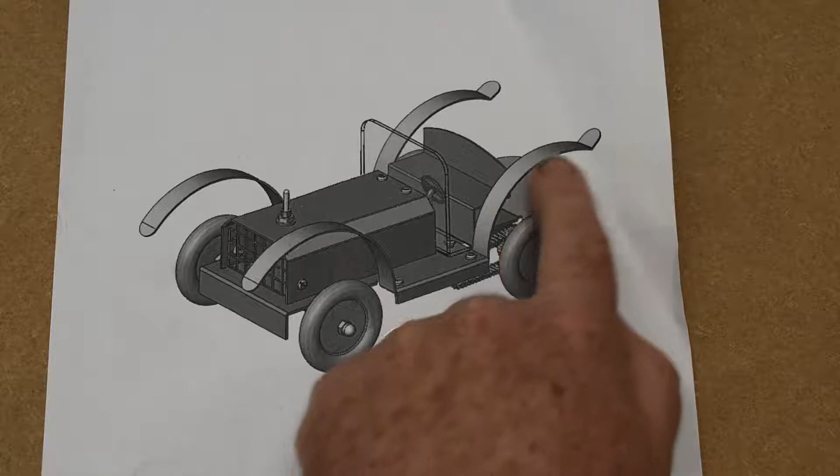In this series of videos we'll be looking at the 2007 Ordinary Level project, which is a vintage car. You can see the picture of it here in front of you. There's some difficult parts in it. The first part is quite tricky to mark out. These can be tricky to bend, the mudguard type features, and they're all one piece. The design feature, you have to design a steering wheel and steering wheel support, and that's it.

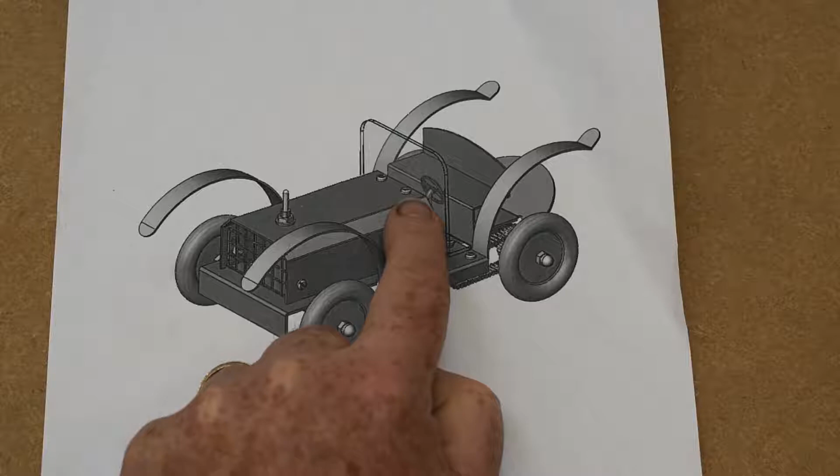And in terms of electronics, there's a switch here which is wired to a motor underneath, and we have a chain driven back axle. The wheels are wooden, so those are bought and we won't be making those. I have them. And the only other thing you'll need then, it will say, is piano hinge. This bonnet will flip up and it's piano hinge attaching it to the windscreen here.

Other than that, it's not too difficult a project. A little bit of bending in it that's a little bit tricky at times, but nothing too difficult. So might as well get started with part one.

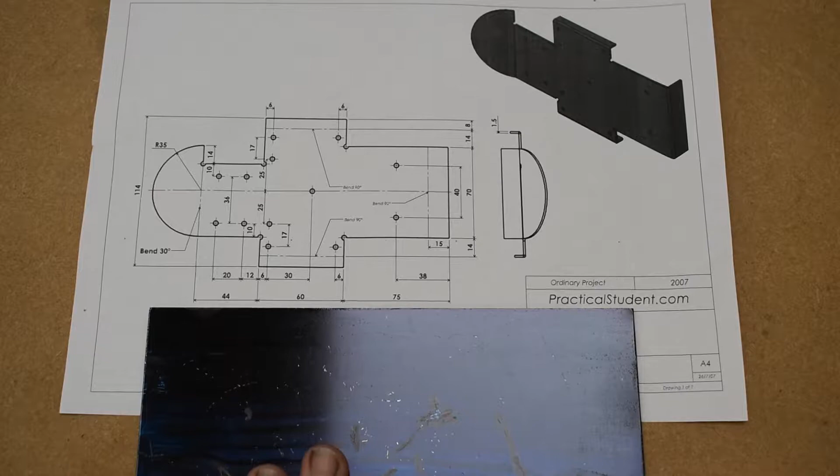So here we have the working drawing for part one. As you can see, there are a lot of holes in it which have to all be marked out for it. I think there's 18 in total, although I'm not 100% sure. It's a little bit different in that there's part of it protruding up and down, so we have a section missing here and here. I'm going to start marking out from this bottom right hand corner.

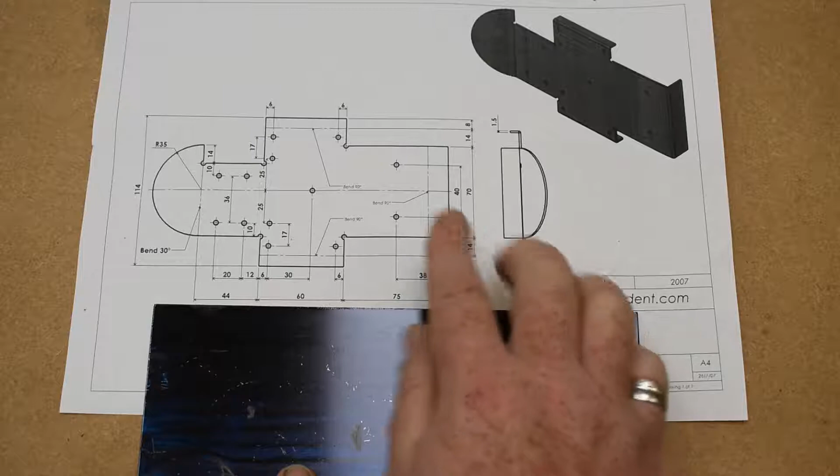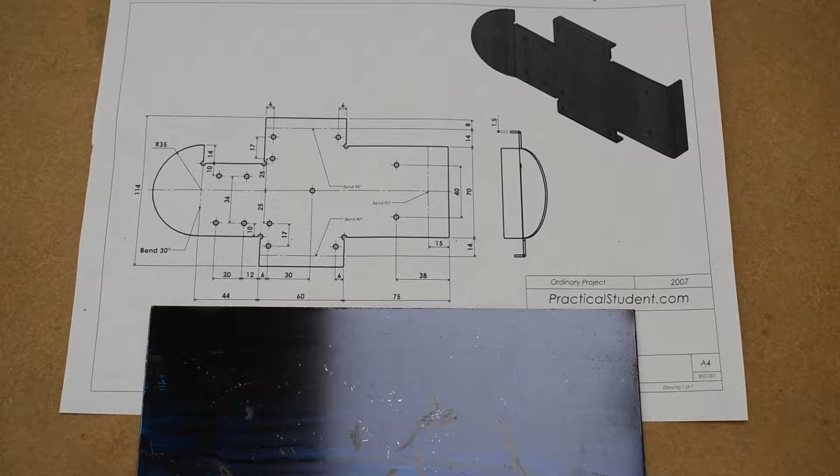Bending it, we have to bend this front curved section up in relative terms to these three sections, the two sides and the back, which have to bend down. So I'll be putting those bend lines on the back side of the piece after I've cut it out, and we'll leave the bend mark here so that we can bend it up. To bear that in mind sometimes when you're marking things out. So we're going to get started, and we're going to try and take in sections like this section first, this section, and the end.

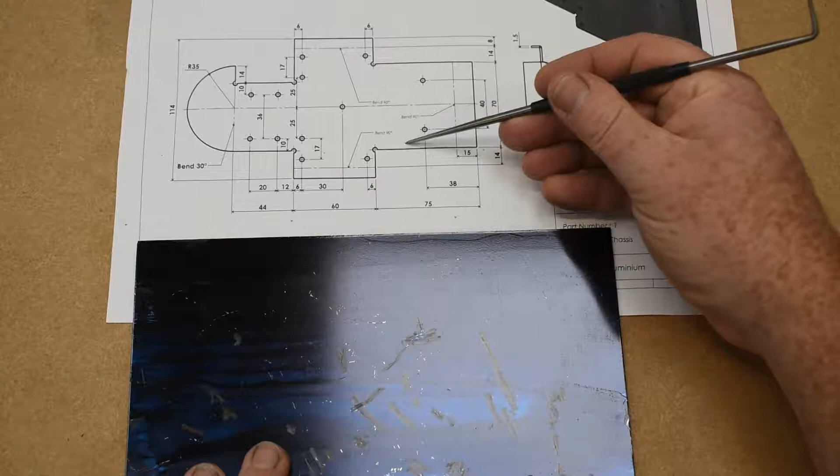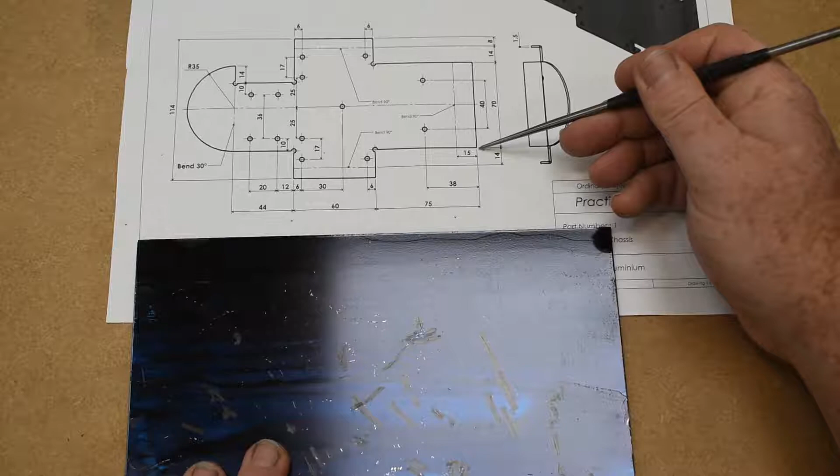So I'll move this a little. Now we see there's a center line here, and this is important. We're told that from this bend line up to this edge is 14 millimeters, but we're not told how far it is from the bend line down to the bottom edge. But because we have the center line, we can see that up here it's 8 for that same section. So we know that this distance from the bottom right corner of our metal up to this line is 8. So we're going to mark out 8, then 14 up from that, then 70, but we're going to mark the 35 in the middle, and 14 and 8 first of all on the right hand side.

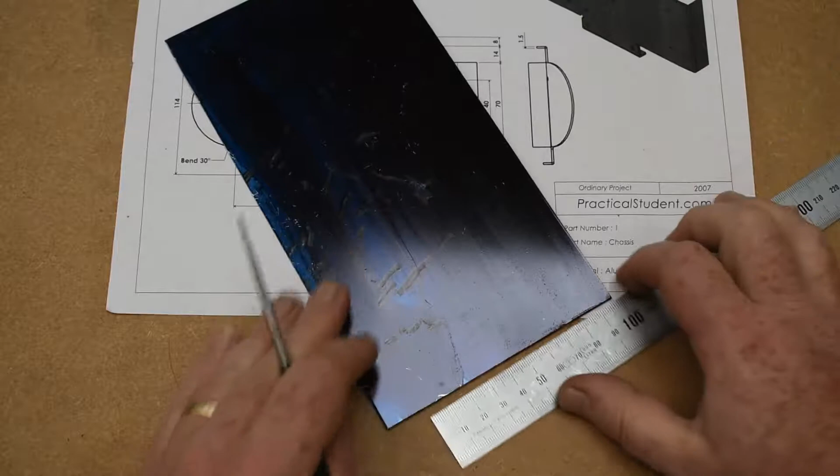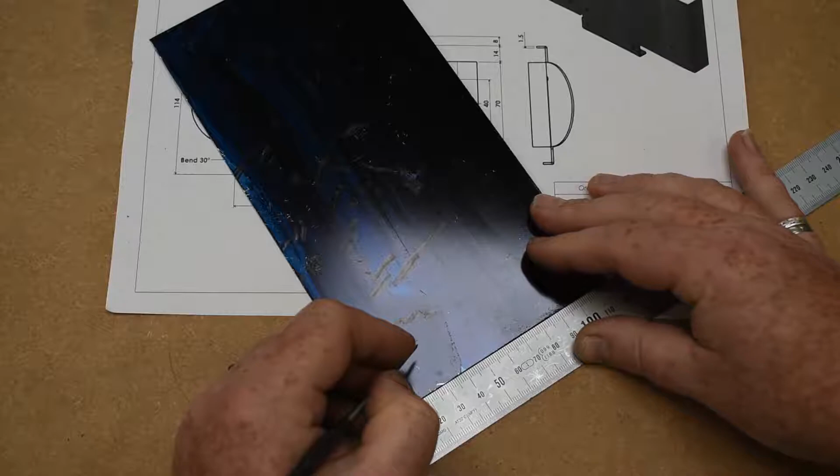So I'm going to come up 8, plus 14 is 22, plus 70 is 92, plus 14 is 106, plus 8 then is 114. I also want to mark the 35 between these 2 points, and there we go.

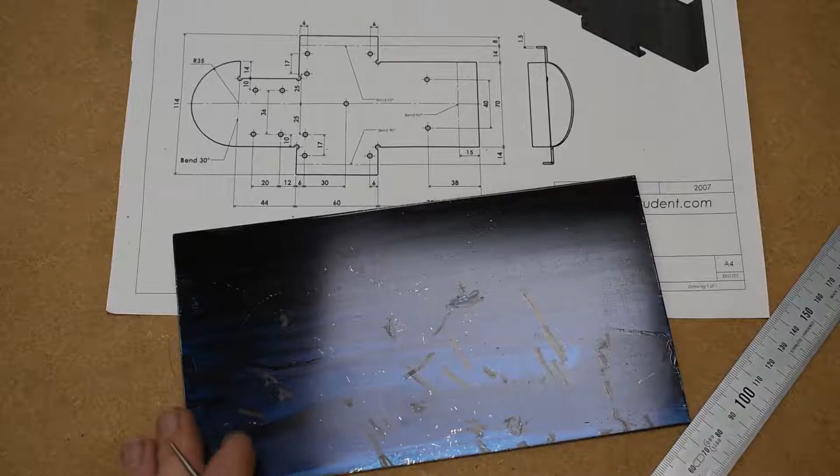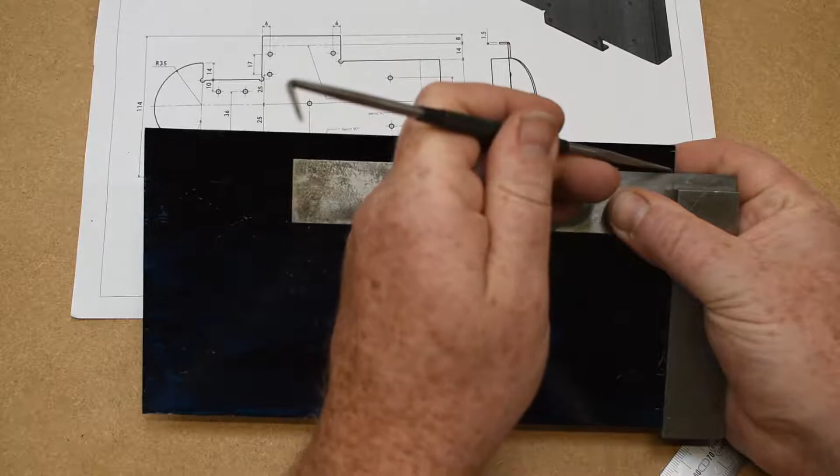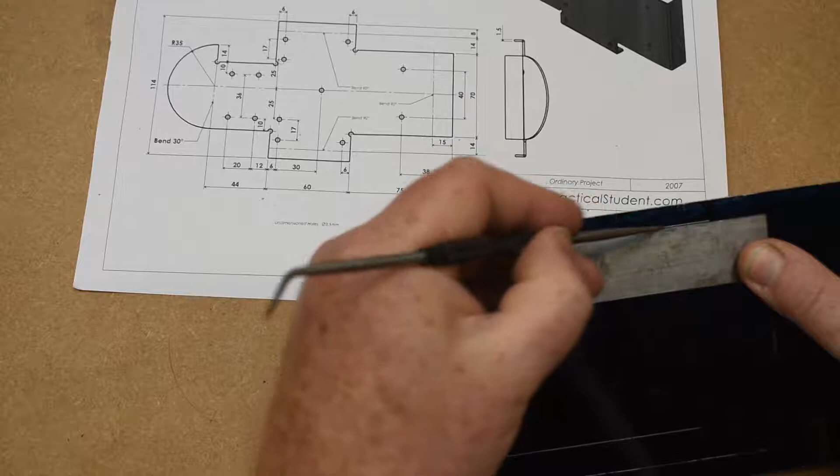Now I'll be able to T-square some of these, and then I'll want to use a ruler for the others, because the T-square won't reach the whole way, but it should reach far enough for these. So I'm going to T-square that line across. This one doesn't need to go the whole way. This one is the bend line here, so we probably need it just about there. And this one goes all the way across, and the center line goes all the way across, and we need this top one just here. So I'll do that one as well.

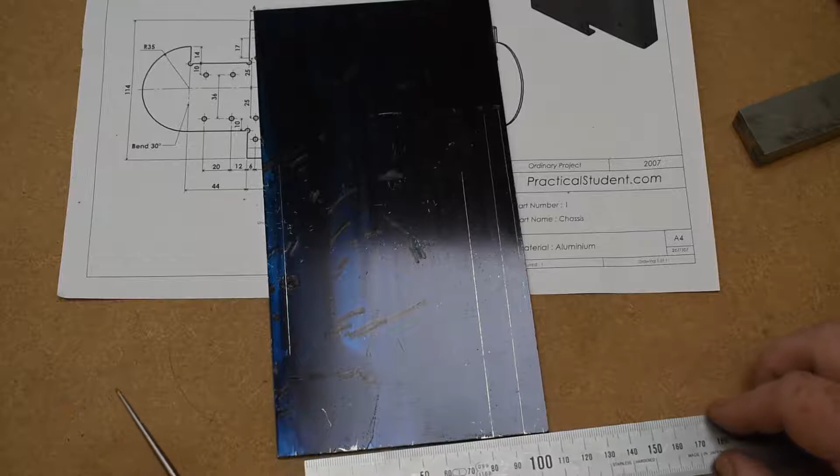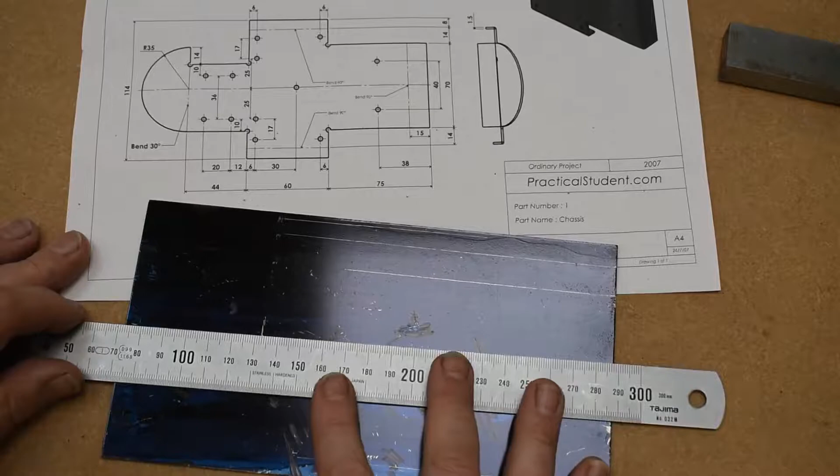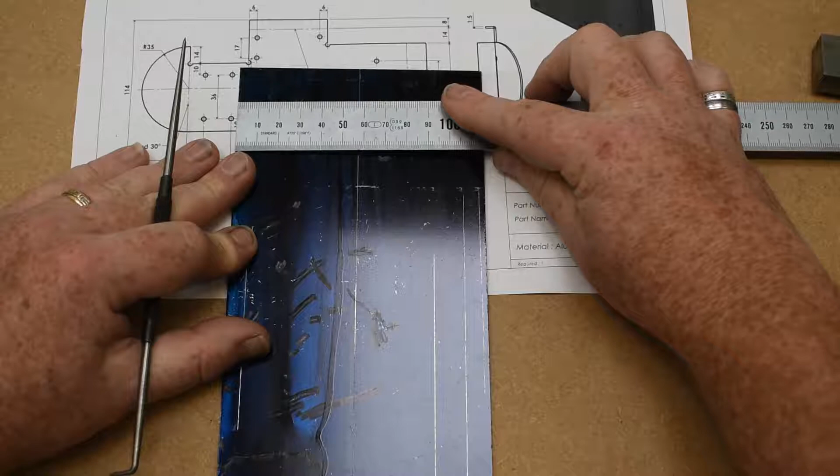Now for the center line, I'm going to measure up the distance here, which is 57. Just double check. I'll mark 57 up here as well. It should be 8 plus 14 plus 35. And I'm going to join those two with my ruler. I also want to do this line long as well, and we know that's 8 plus 14 up. So 8 plus 14 is 22, and I can join those two marks up as well.

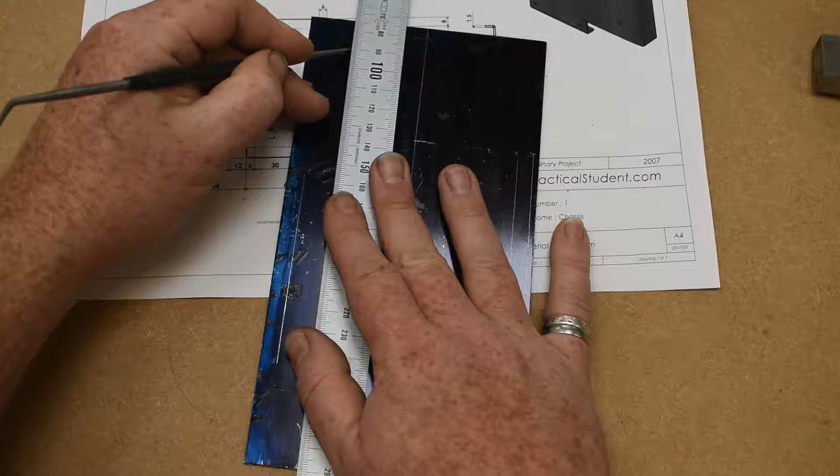So that's most of the horizontal lines for now. So let's deal with this section first of all. So it's 75 up to this line. So 75 from the bottom right hand corner. T-square that line up.

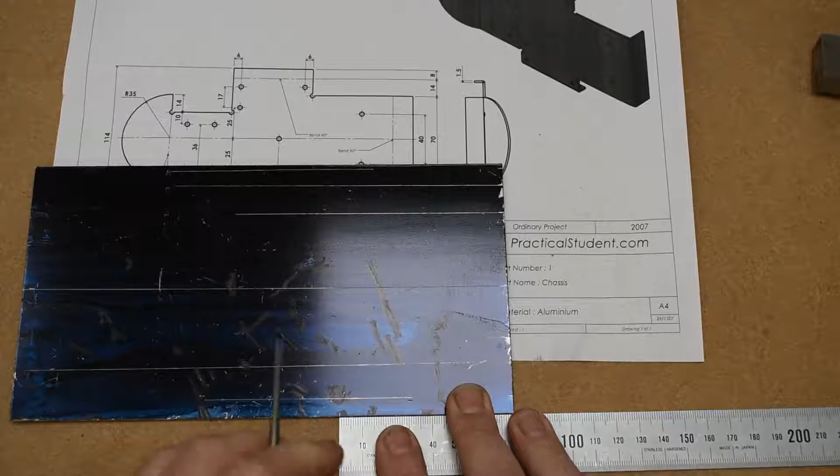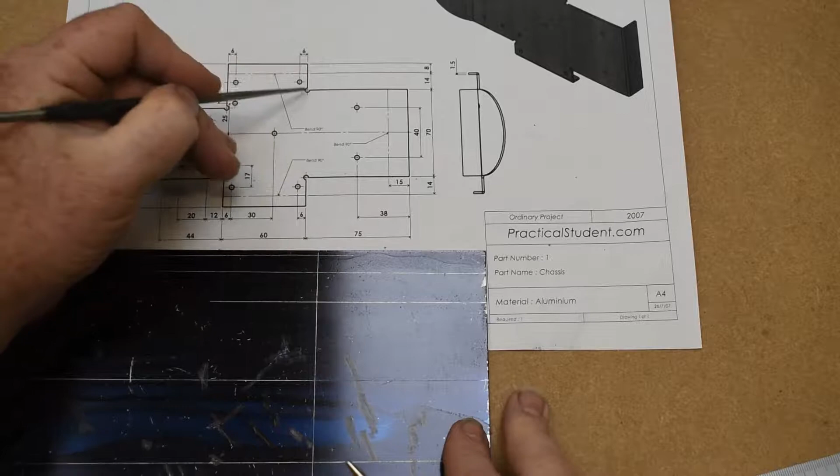Now we're going to have a hole here, so I'm going to center punch that point and this point here, which are on the 14 lines. And we also have a bend line here, 15 in, and 38 in.

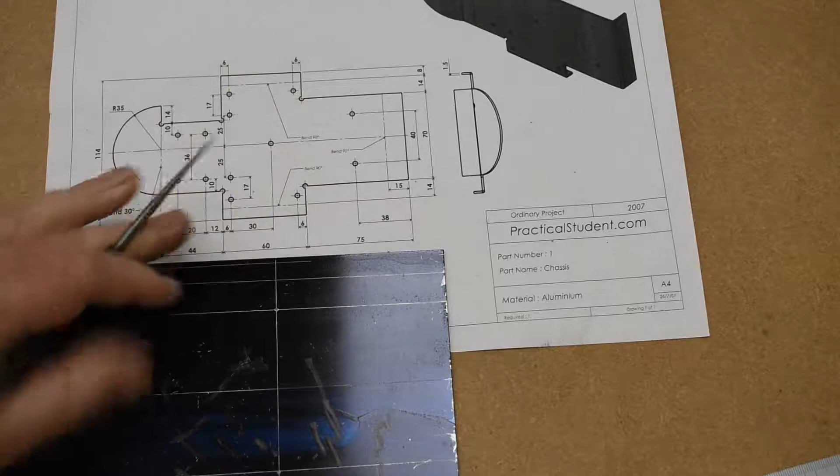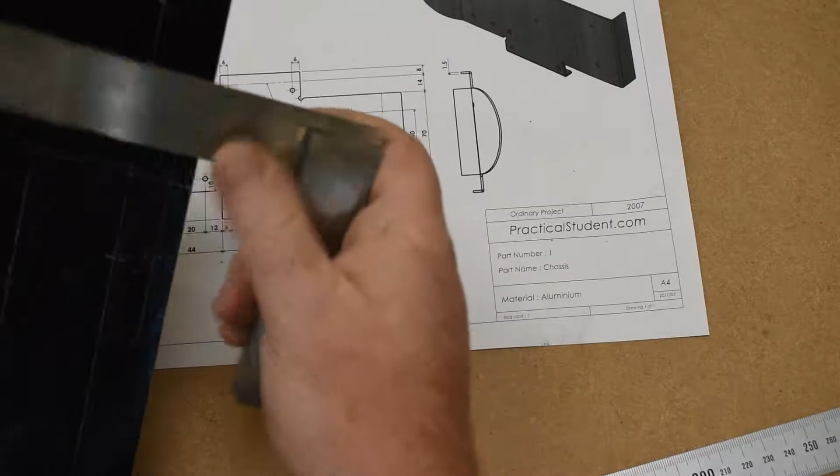We have these other two holes. So 15 from the right hand side, and I'm going to measure 38 in as well. That's 10, 20, 38. I'm going to T-square those up. I'm going to dash the bend line. Onto a solid 38 line.

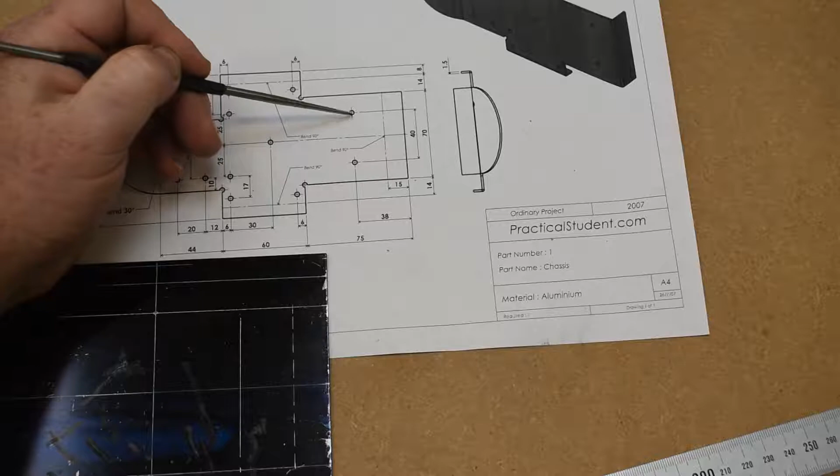Now we're told here that the distance between these two holes is 40, so therefore from the center line it must be 20 up and down. So if I put 100 on the center line, that's 120 to the right and 80 to the left. I'm going to punch both of those. I'm going to drill holes there.

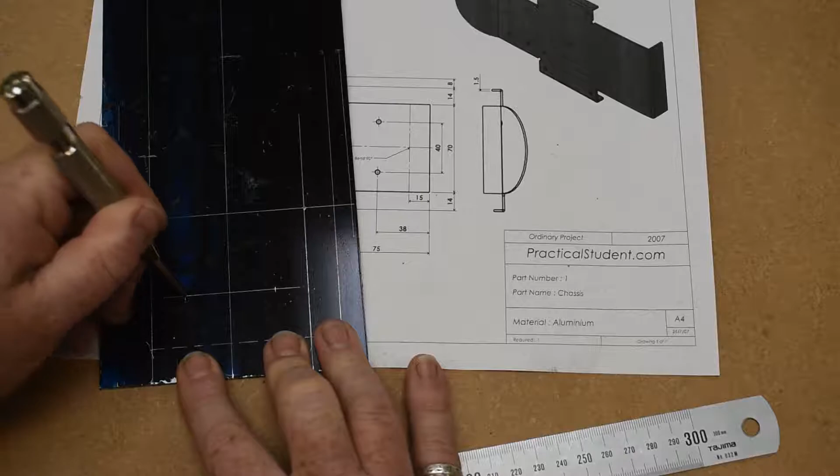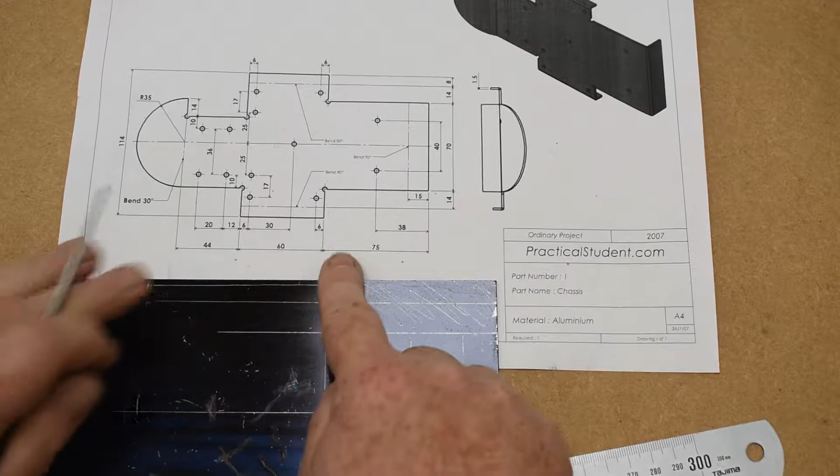I'm just going to shade in the two areas here because we'll be cutting those off later on and it makes them stand out a little bit. So that's the back section done. So now it's the next section. We're told here it's 60 wide. So I'm going to measure from my 75 line over 60. T-square that line straight up.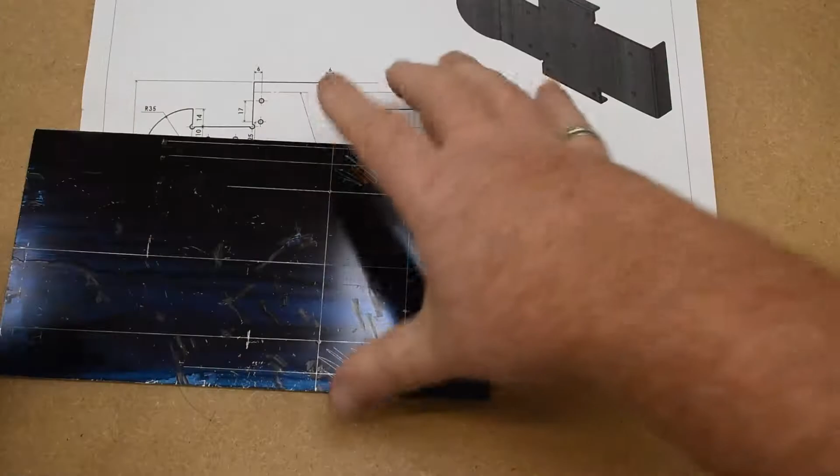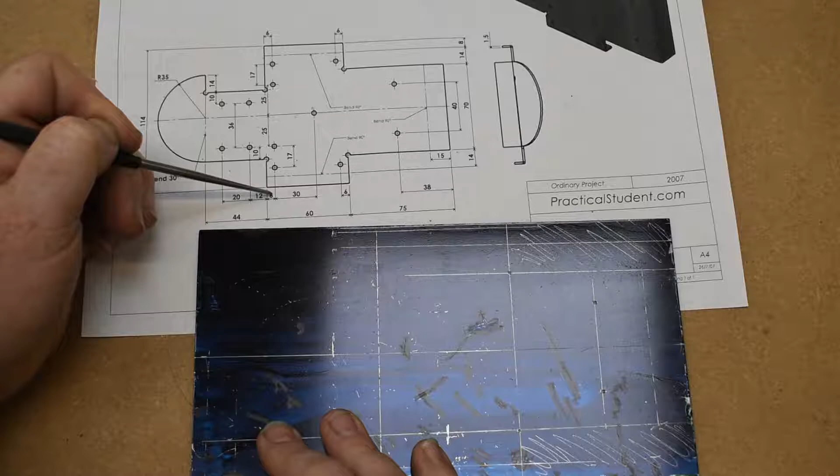Now let's see what we need to worry about in here. So these two holes are 6 millimeters from the edge, and these two holes are 6 millimeters from the edge, and this one on the center line is 30 plus 6 from this line. So on the center line we can measure across 36 quite easily. Mark that and punch it straight away.

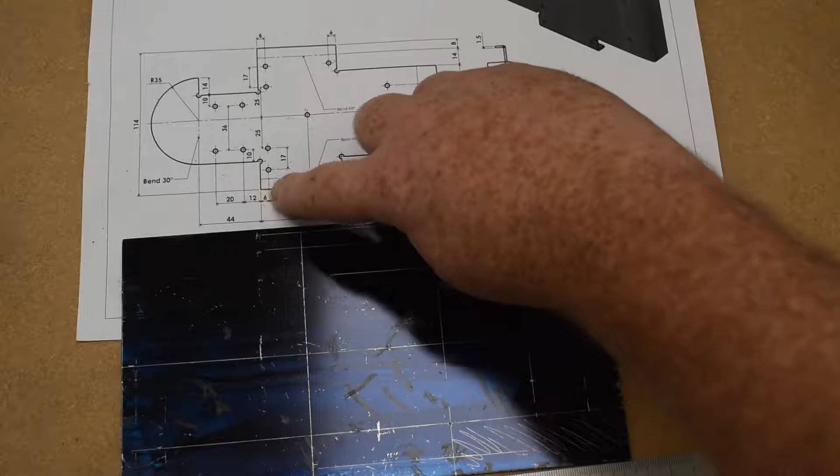And then for these other 6 holes, because there's 2 here, we're going to measure 6 in from this corner and 6 in from this corner, and then T-square the lines up.

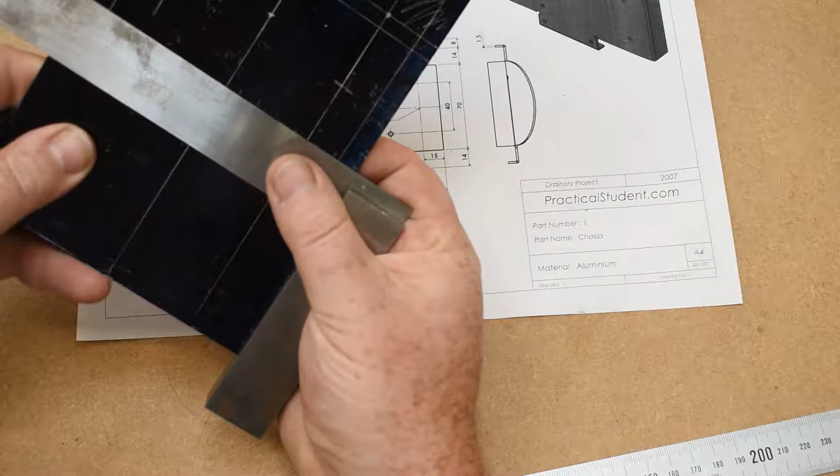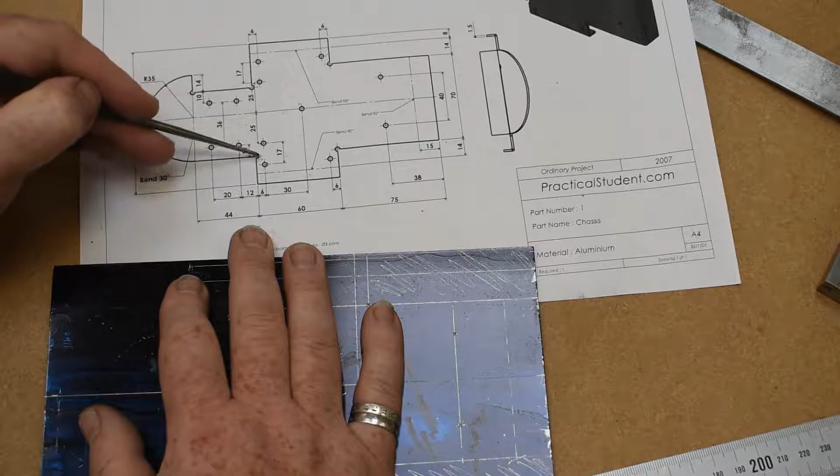So let's figure out where these holes go. It's actually quite involved when you look at this drawing. So we have this line here and we're told that it's 10 to this line for these 3 holes, and then 17 back down. And that's the same as 25 from this line to the centre line. We're also told it's 25 from the centre line up to this hole and then another 17. So we're going to use that. We're going to measure out 25 and then 17 from the centre line in both directions.

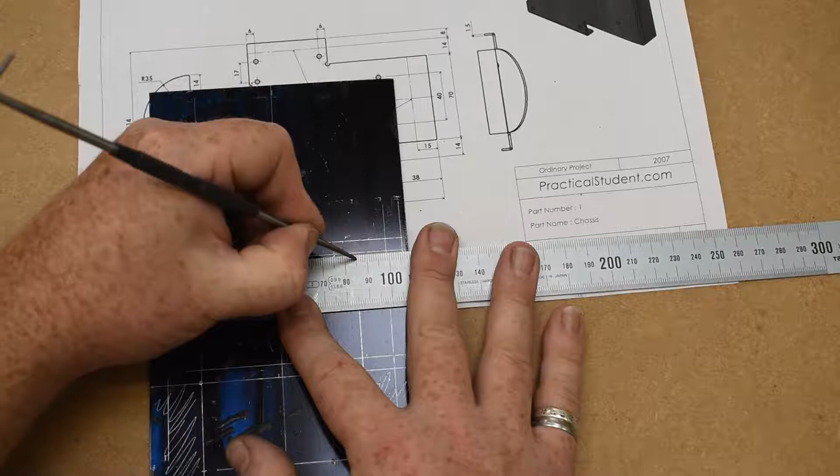I'm going to start on the centre line with 50. If I go 25 down, that gives me 25. And if I go 25 up, I'm at 75. And from there we need to go 17 millimeters each direction as well. So that's 10, there's 17, that's 10, and then another 7. There we go. So we now have those 4 holes which we can punch before we lose them.

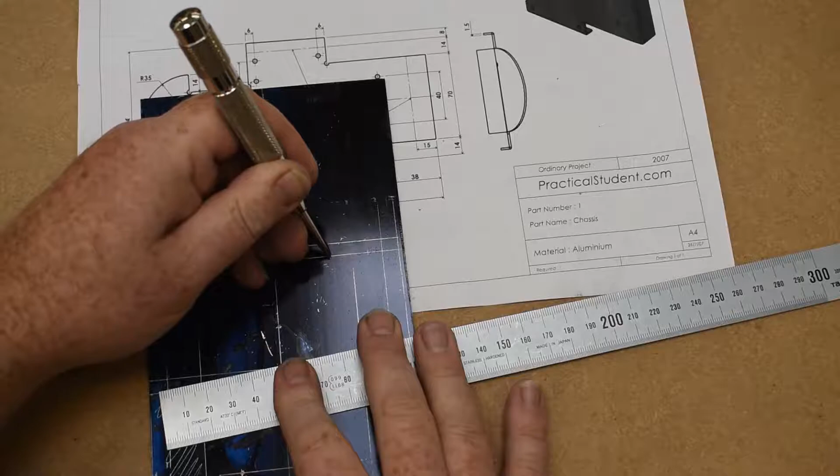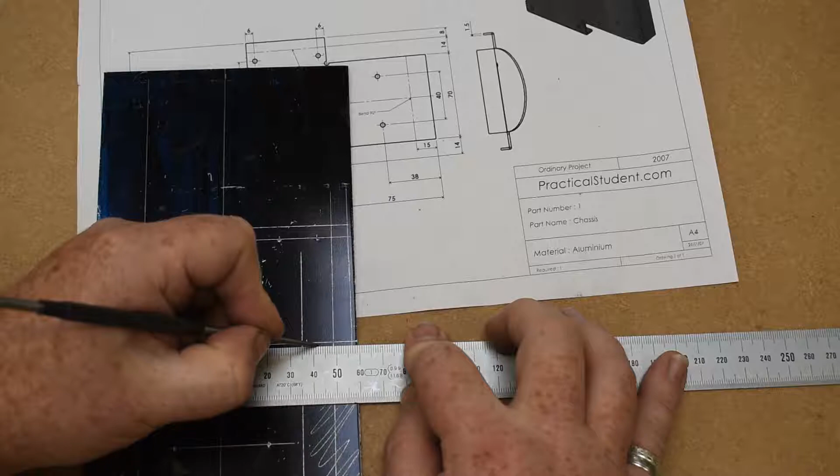And you can either T-square these lines and transfer them over, or you could calculate the distance there, which is 25 plus 17 or 42, and measure that out as well, which I'm going to do. And again, we punch those and we have that middle section done.

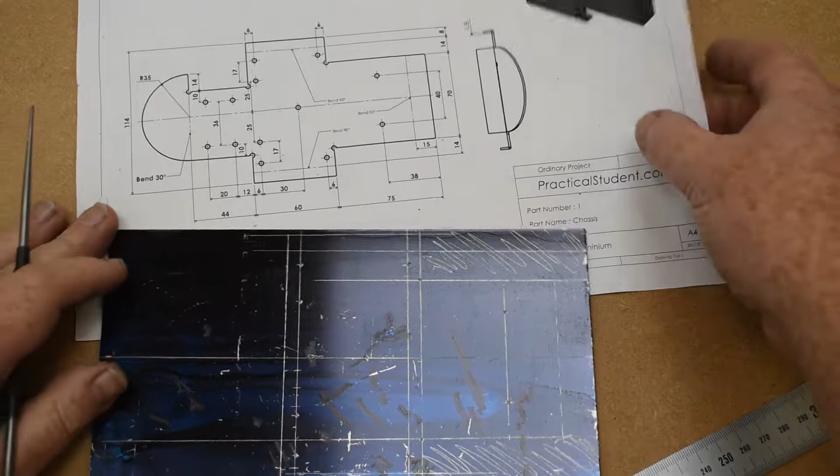Okay, so on to the next section here. We're told down here it's 44 across from the 60 line. So I'm lining up 44 on my ruler here. I mark the end of the ruler, I'm 44 away. T-square that up.

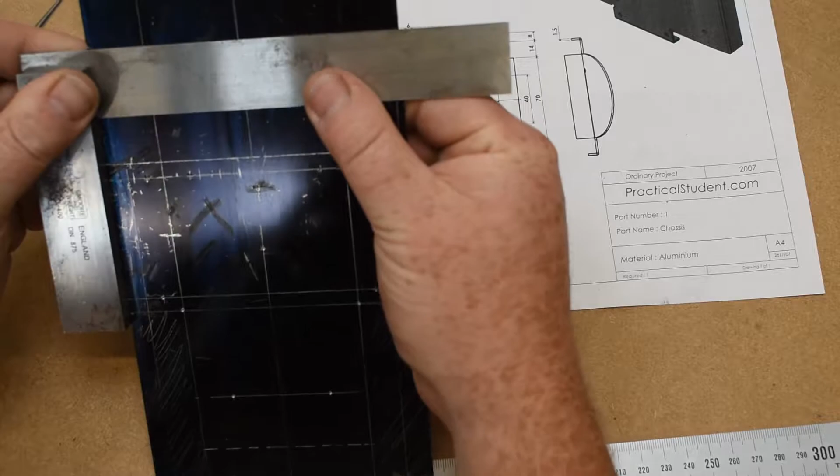And that coincidentally gives us this point here, which is the centre of this curve. We might as well do that now. So I'm going to punch there. Set my dividers to 35 millimeters. So I'm starting at 10, which means I have to go to 45. And I can draw that semicircle.

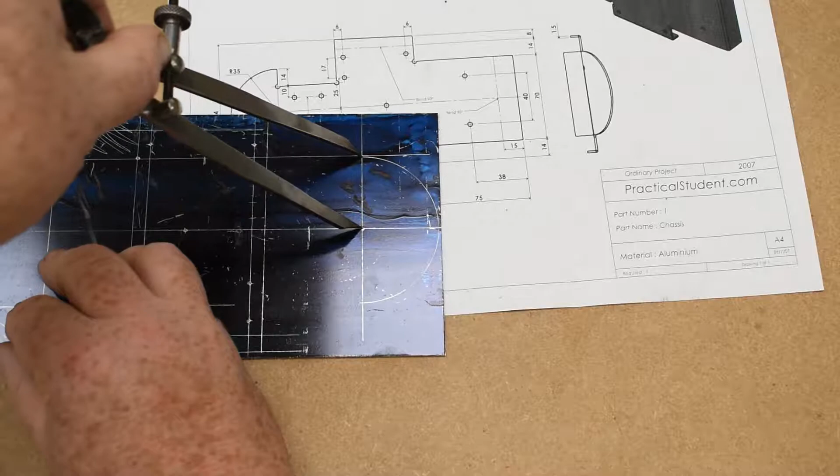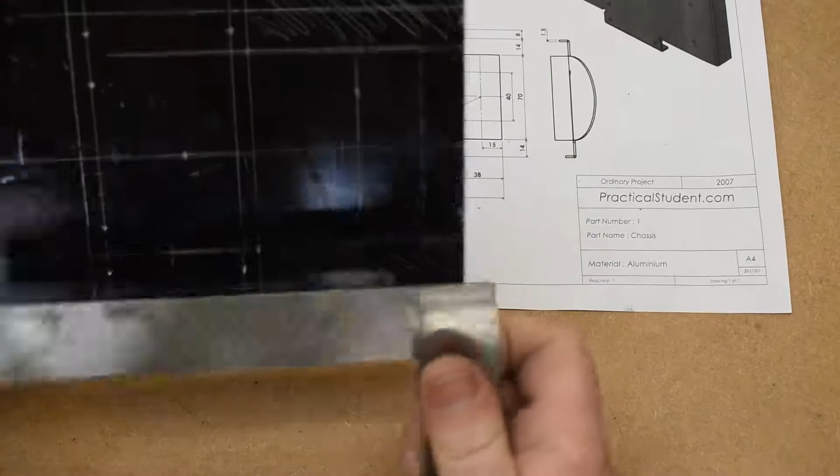Okay, so let's look at these 2 holes here first of all. They're on the same line as this one, so we can T-square that point across first of all. Will my T-square reach from this side? Looks like it will. Maybe not. I know this piece is square, so I can T-square it from the other side.

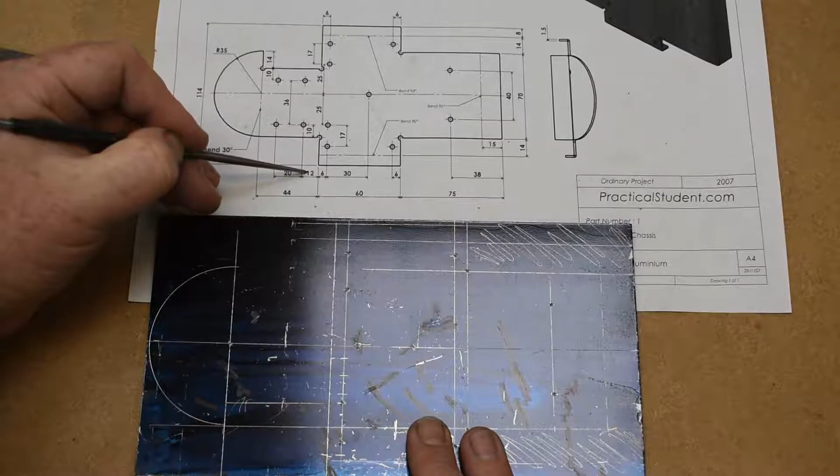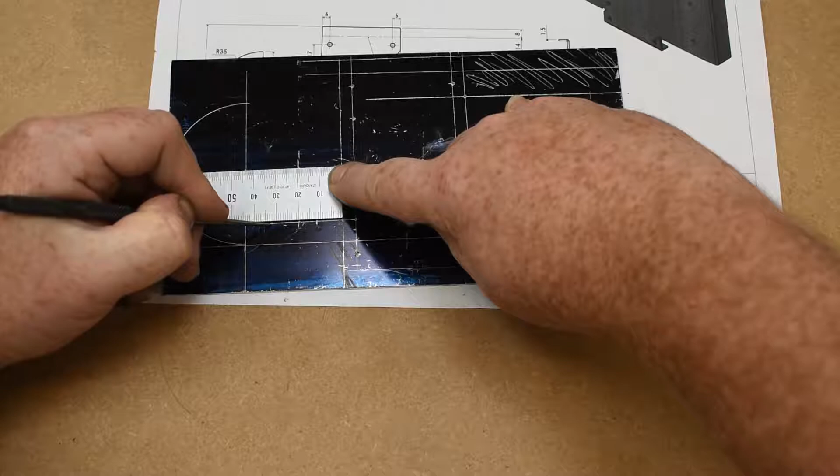And then the distance from the 60 line to the first hole is 12, and then to the next one is 20, which is a total of 32 from here. So I'll do it upside down this time. So there's my 60 line. So I need to go 12 from that, and another 20, which is 32. I'm going to punch those. And we're nearly there.

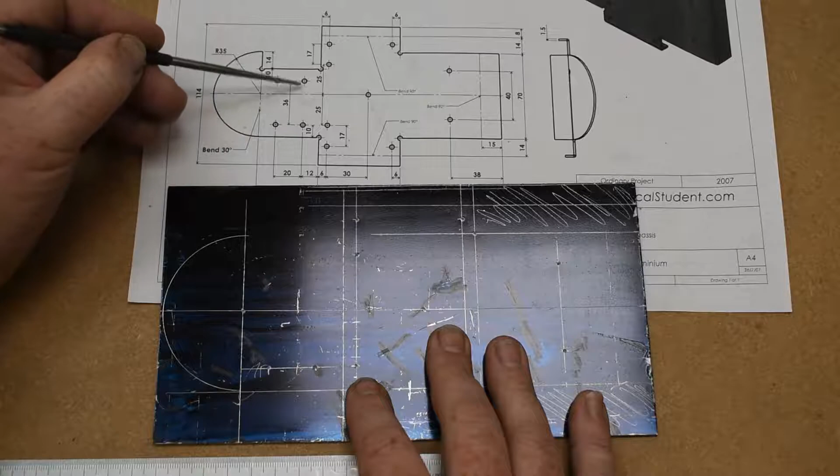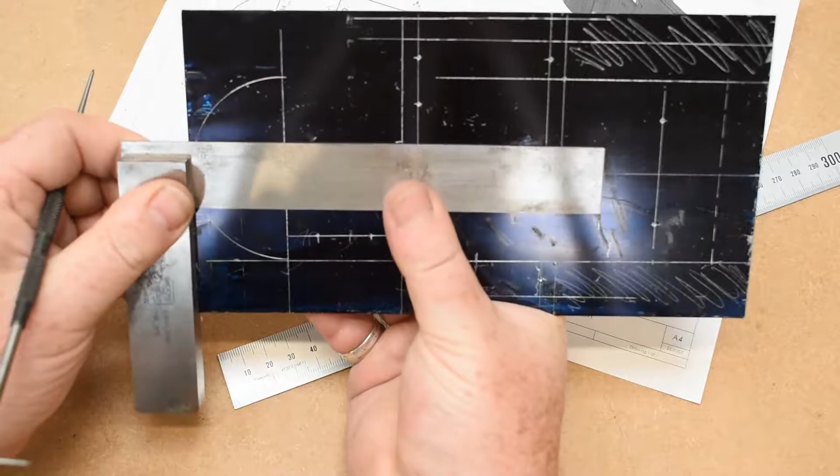The centre line for these 2 is 36 up from the centre line for these, and they're on the same vertical line. So I want to measure over 36. I'm going to T-square this point to the left. And then transfer the 2 punch marks straight up. And then punch those.

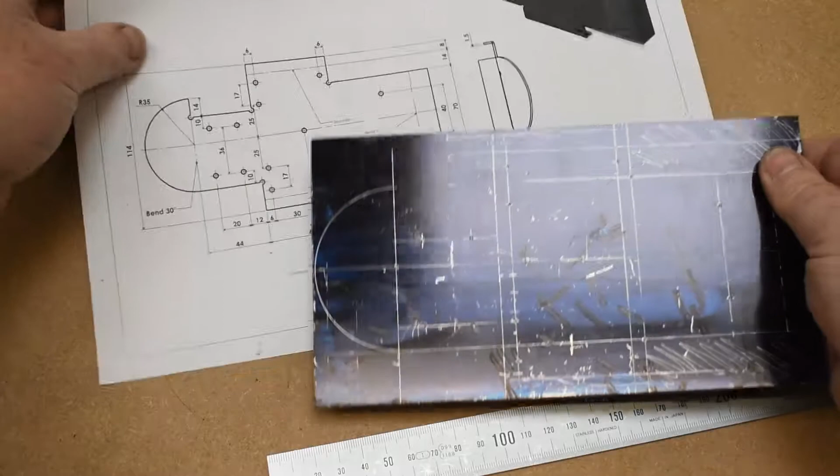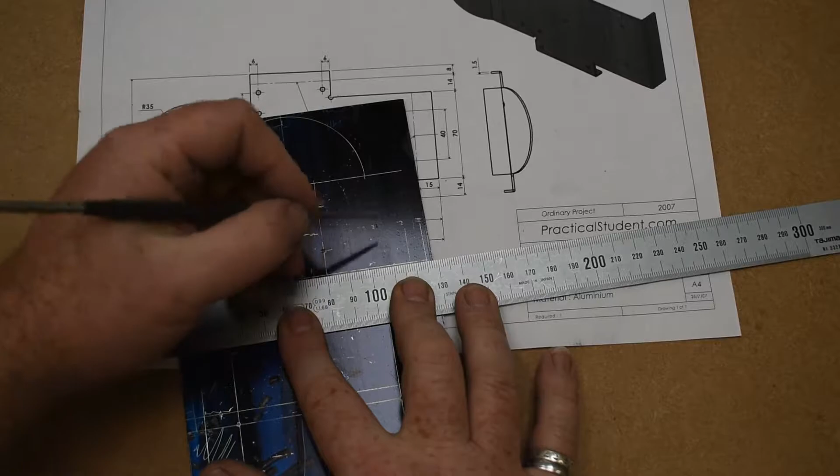We are then told that from these 2 it's 10 millimeters up to this line, and at each end of the line we have a punch mark for a hole as well. So 10 more millimeters up. So you square that across. And we're going to punch here and here.

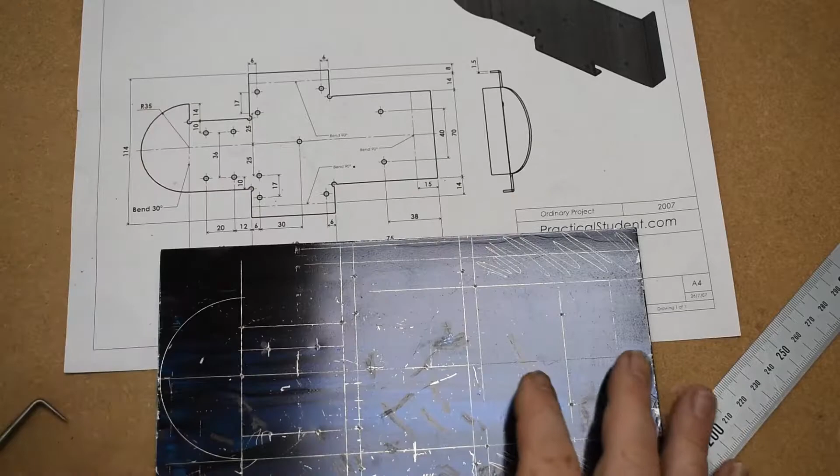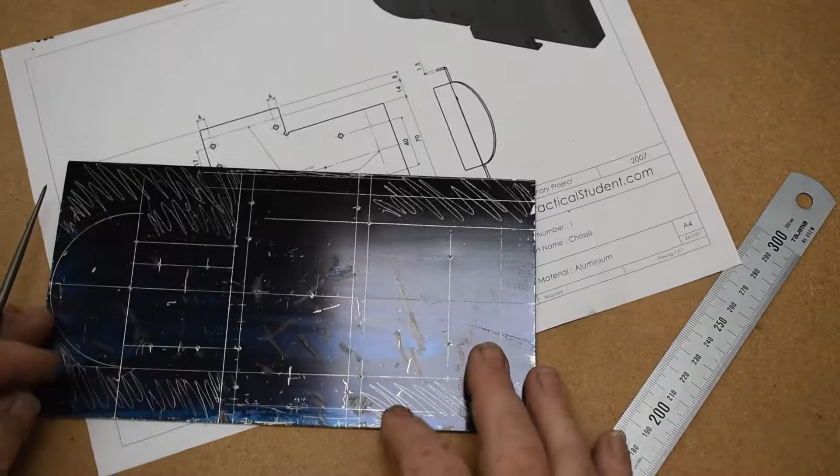And that's it, we have the part marked out. Just going to shade in some of the areas to give us a better idea of our final shape. So that's it marked out. It's quite tricky, it's not easy, but it's very doable if you take it in sections.

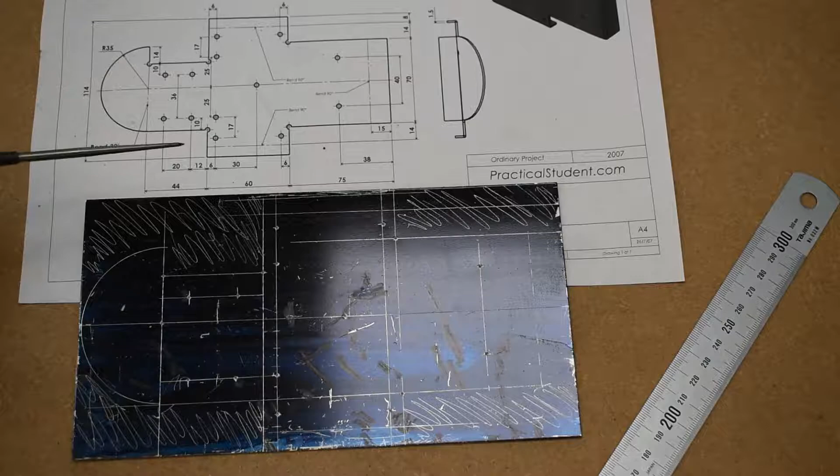So now we have to go drilling holes, and we have a lot of holes to drill. 19 holes to drill, if I counted correctly. They are all 3.5. The drawing tells you, might be difficult to read here, but undimensioned holes stand for 3.5, and that is all of them.

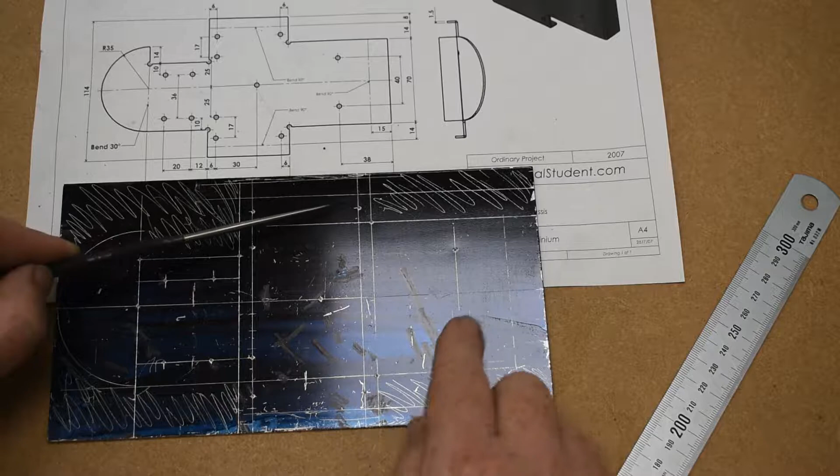So I'm going to go drill those now, and then I'm going to use a bandsaw. You'll have to use a hacksaw or snips to cut out the different sections, file it down, and then I'll transfer these 3 lines, bend lines, onto the other side, and then we'll bend it.

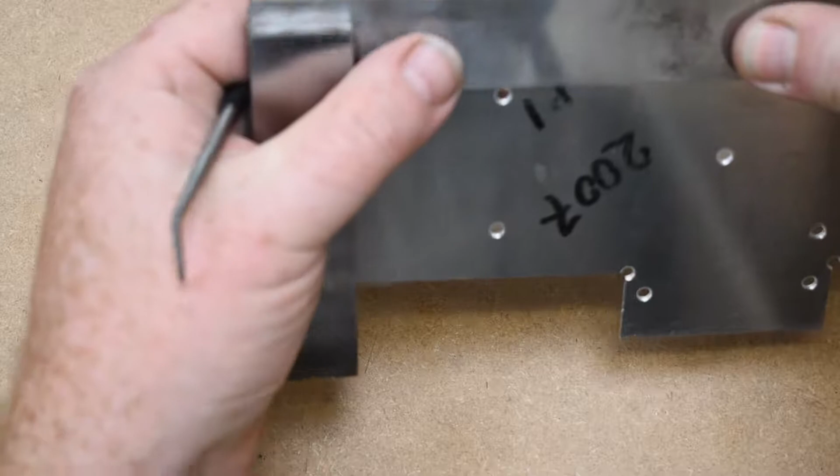I want to transfer these 3 lines over to the back side of the piece. So I'm just going to use a T-square, and I'm going to line up the T-square on the back of the piece with the line that I want to T-square. I'm making sure that the piece is up against the handle here, and I'm going to flip that around, keeping contact the whole time here, and I can double check any time I want that it's still lining up. And I'm just going to draw the line here.

Going to do the same on the other side. Line it up as carefully as possible, flip it over, make sure the piece is still up against the handle, and draw in the line. So I have those 2 lines here.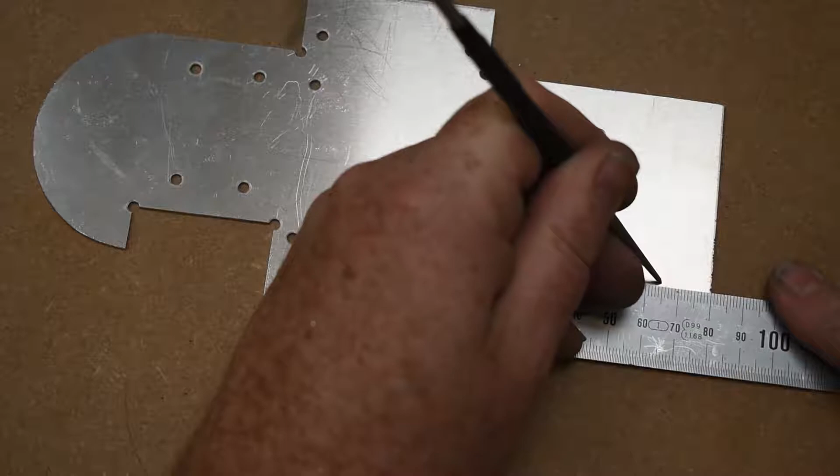This line, can I do it the same way? I can, although it's not as good because the T-square wants to tilt when I'm lined up there. I know from the drawing this is 15 millimeters down. So I'm just going to mark 15 on both sides. I think it'll be more accurate. And just draw a line in between the 2 little dots that I put there.

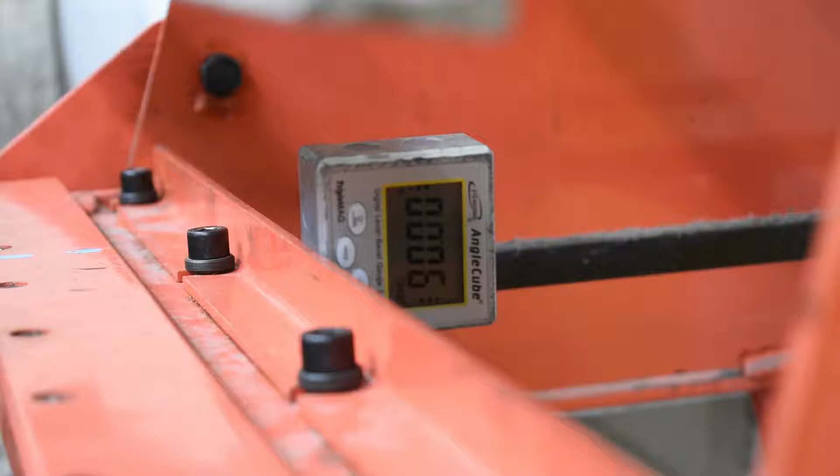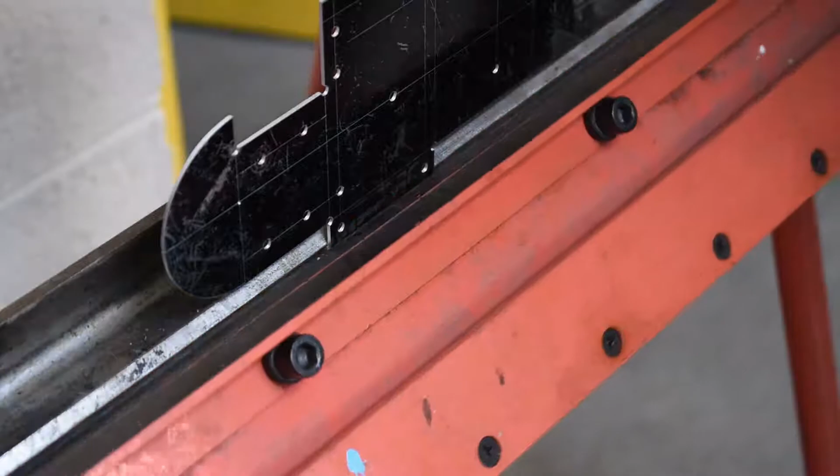So now I can go bend the piece. So I'm going to set up for these 3 first, and I'm going to bend them with this side up, and I have to set up for 90 degrees. Alright, so I'm going to bend these 2 sections first. And now the end section here. So that's those 3 bent this direction.

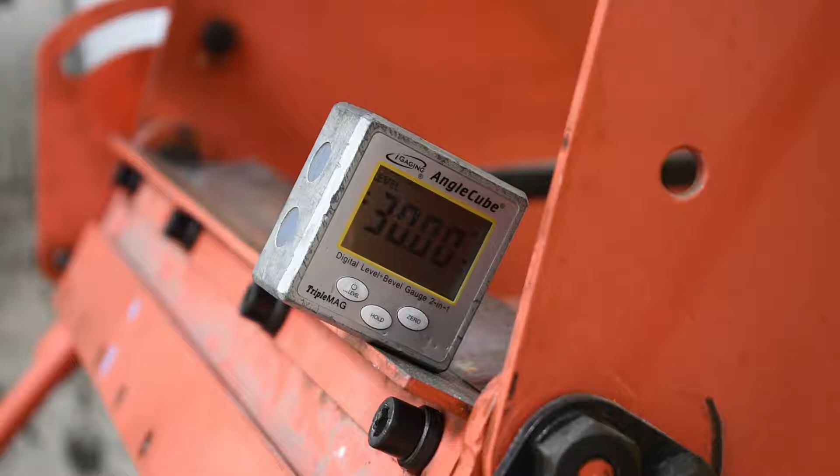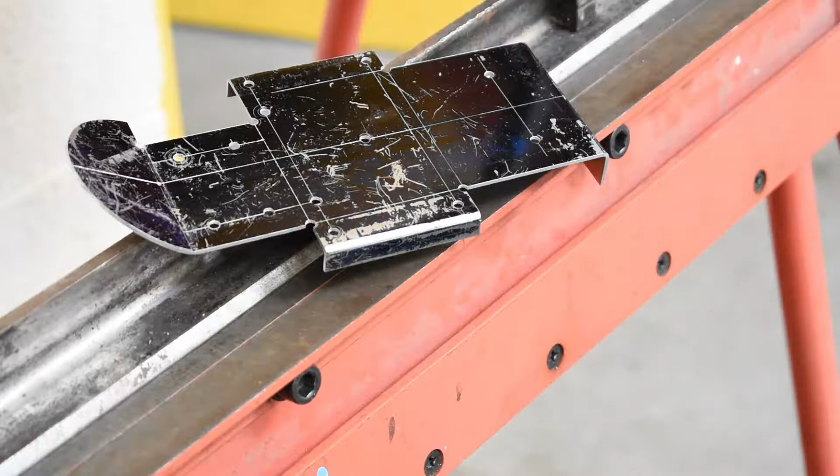Now I want to set up for 30 degrees and bend this forward like that. And there we go. There's our piece bent. That's the piece finished. All that needs to be done is it needs to be cleaned now and spray painted, whatever colour I decide to do it later on. A little bit of emery paper work as well.